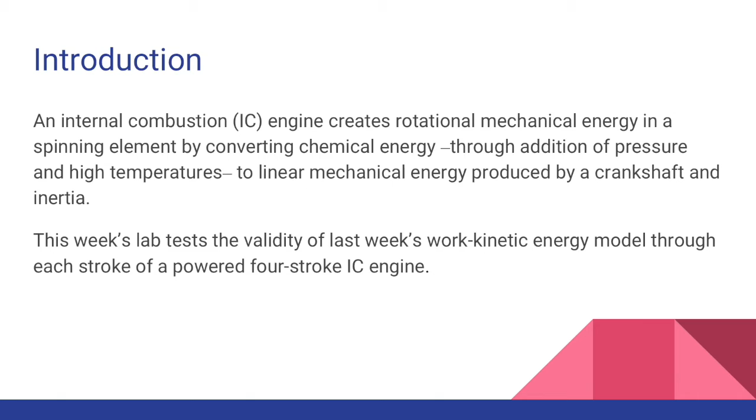To start our analysis, we must first understand each stroke of our engine. During the intake stroke, air is taken into the cylinder through the intake valve while keeping the exhaust valve closed. During compression, both the intake and exhaust valves are closed as the air inside the cylinder is compressed towards the highest point of the piston's travel. This point is known as the top dead center, or TDC.

During the power stroke, compressed air is going to be forced into the cylinder next week during Part 3 to resemble the explosion that is normally created with an air-fuel spark mixture. The piston will travel to its lowest travel point, also known as the bottom dead center or BDC. During this process, both the intake and exhaust valves remain closed.

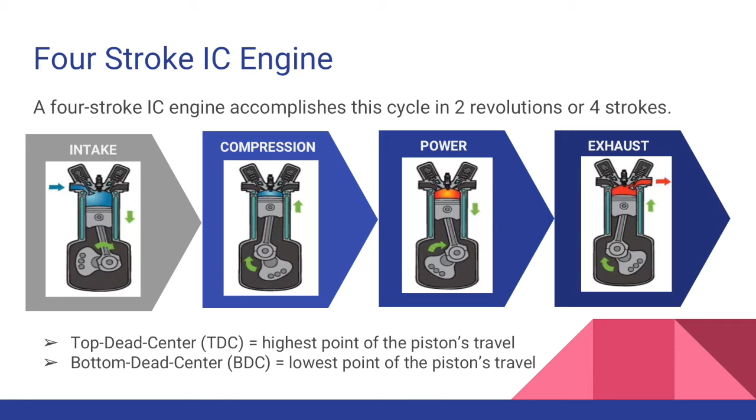During the exhaust stroke, air is released out of the cylinder through the exhaust valve while keeping the intake valve closed. Looking at the graph, we can see that to go through one cycle of our 4-stroke IC engine, the piston displacement will go through 2 total cycles.

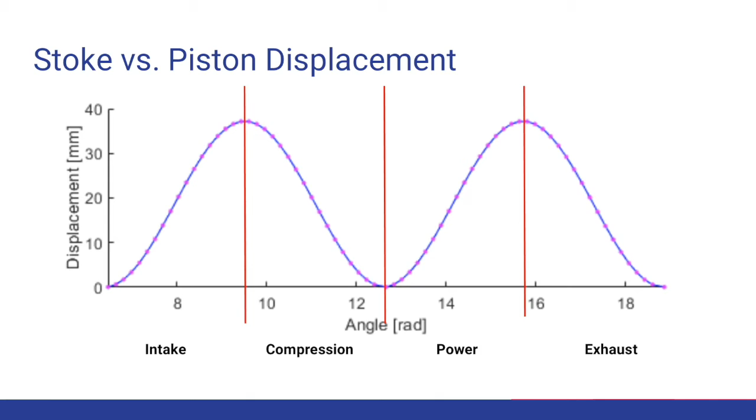From 0 to pi, it's the intake stroke. From pi to 2 pi is the compression stroke. From 2 pi to 3 pi, the power stroke. And finally, from 3 pi to 4 pi, the exhaust stroke. Our first step was obtaining a calibration equation. With the data provided, a regression line was performed, resulting in the calibration equation on the screen.

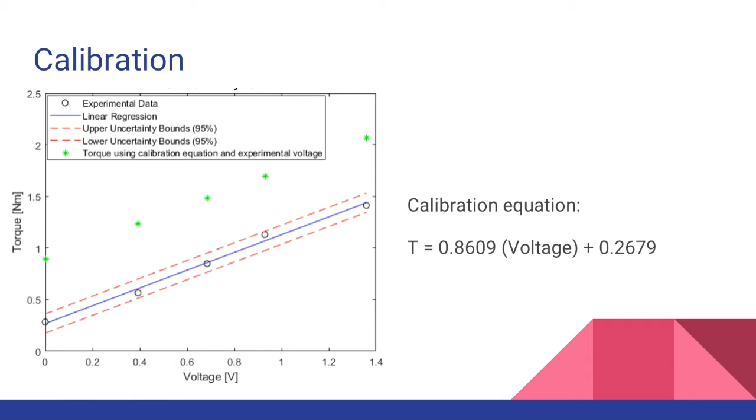During Part 1 of this lab, we learned that the change in kinetic energy is equal to the work done by the motor, air, piston, friction, and error. Since the head of the motor was removed, we were able to neglect the work on air. Also, the displacement of the piston head was found to be relatively small, so the piston work is assumed to be 0 along with the work error.

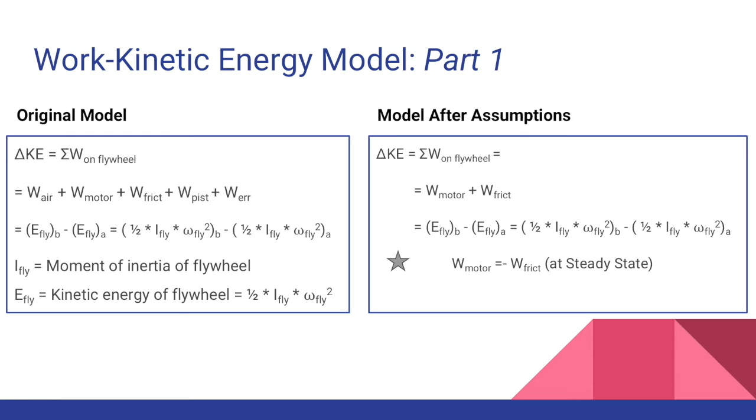Using the work of the motor, torque, angle change, and the angular speed, we were able to calculate the inertia of the flywheel. This is done by accelerating the motor from rest in 2 different cases. In the first case, the motor has 4 flywheels attached, and in the second, only 1. Since we are starting from rest, we can say that omega fly at point A is 0. Therefore, the work kinetic energy model is equal to equation 2 on this slide.

We know all the variables needed to calculate I-fly for each case, since omega fly is equal to the derivative of the angular position versus time graph. But first, we need to understand what I-fly actually is. I-fly for this equation is really the moment of inertia of the flywheels combined with the internal shafts and gears. Therefore, we need 2 acceleration cases because the moment of inertia of these internal parts cannot be solved analytically.

To find the moment of inertia of one flywheel, we must subtract the moment of inertia of one flywheel plus the internal components from the moment of inertia of 4 flywheels plus their internal components. This way, the internal components' moments of inertia will cancel out and leave us with a number that is equal to 3 times the actual moment of inertia of an individual flywheel. Now, to find the moment of inertia of an individual flywheel, we simply divide that value by 3 and get the experimental moment of inertia equal to 0.0022 kilogram meters squared.

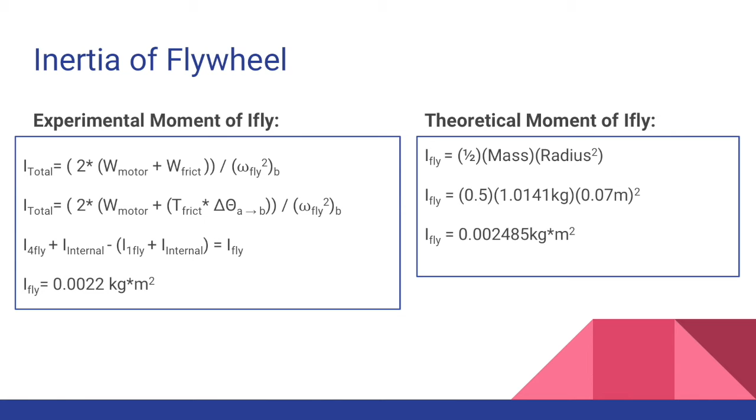The theoretical moment of inertia of a flywheel is found by assuming that the flywheel is a solid disk and using the equation to solve its moment of inertia that way. This was found to be 0.002485 kilogram meters squared, which means our experimental values has an error of 12.9%.

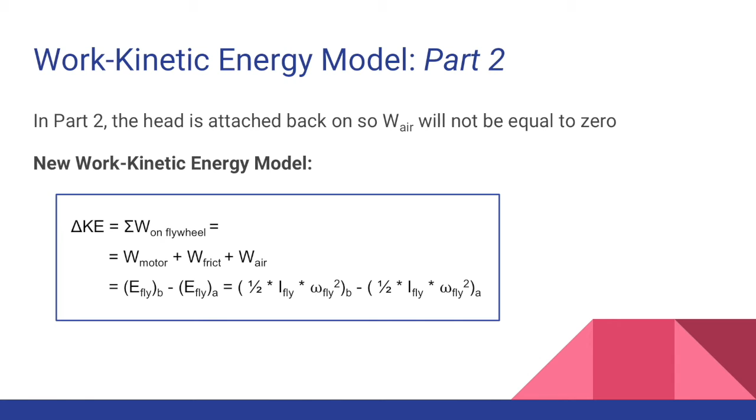The biggest difference between Part 1 and Part 2 of this lab is that now we are reattaching the head. This means that our work kinetic model needs to be adjusted as W air cannot be neglected. During the intake and exhaust strokes, the valves are open, so for those strokes, we can neglect W air. Without pneumatic injection, we can assume that the work in the compression and power stroke are the same in magnitude but opposite in sign.

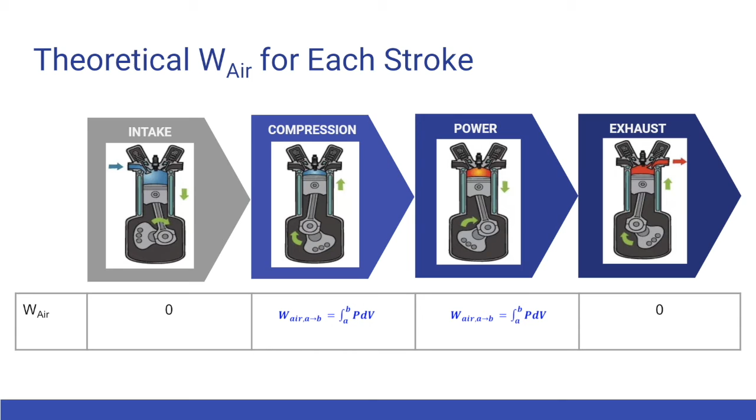The value for work air in the compression and power stroke is equal to the integral of the pressure with respect to the volume, from the beginning of the stroke to the end of the stroke. To calculate the theoretical value of W air, you must first choose if you're going to use the compression or power stroke. In this case, we chose the adiabatic compression stroke. Using known values, we were able to calculate the theoretical W air values.

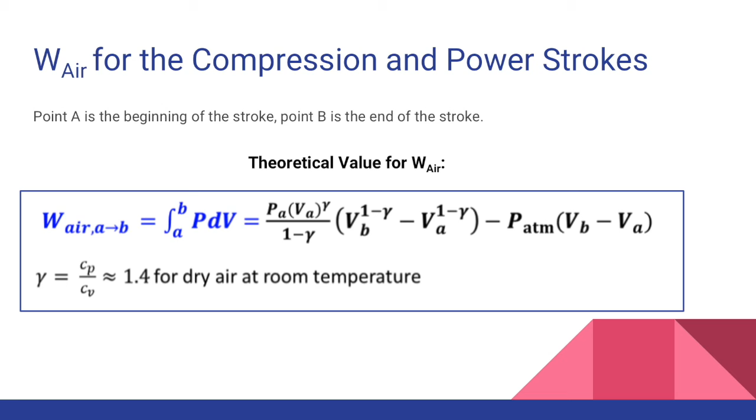The experimental value for work air is found using our new work energy equation. Setting points A and B as the beginning and end of the compression stroke respectively, we can calculate work air. This is because we used the value from I fly from part 1. The angular speeds at point A and point B can be found by taking the derivative of the angular position versus time graph and indexing at the appropriate times for the beginning and end of the stroke.

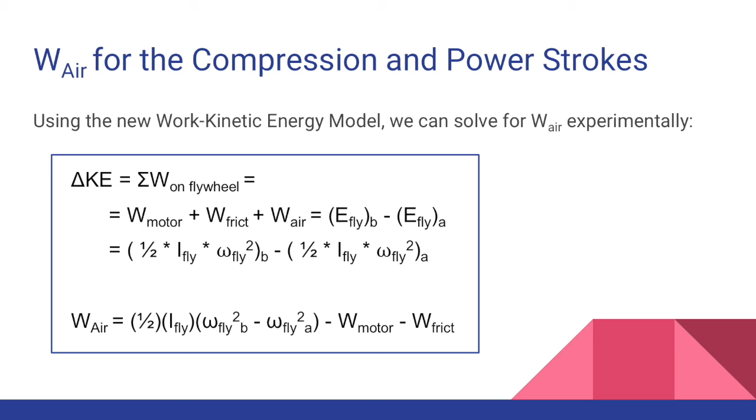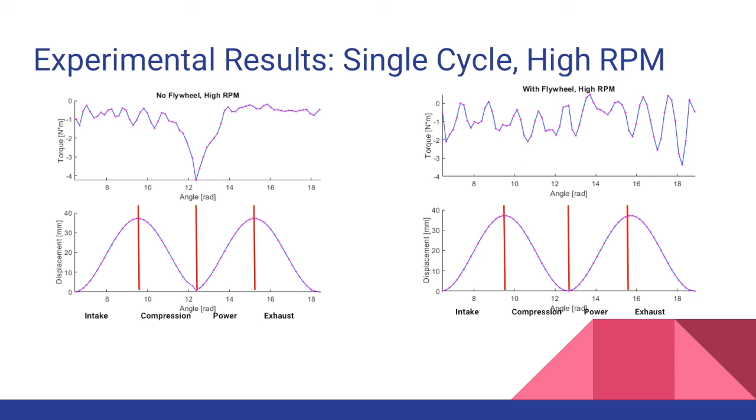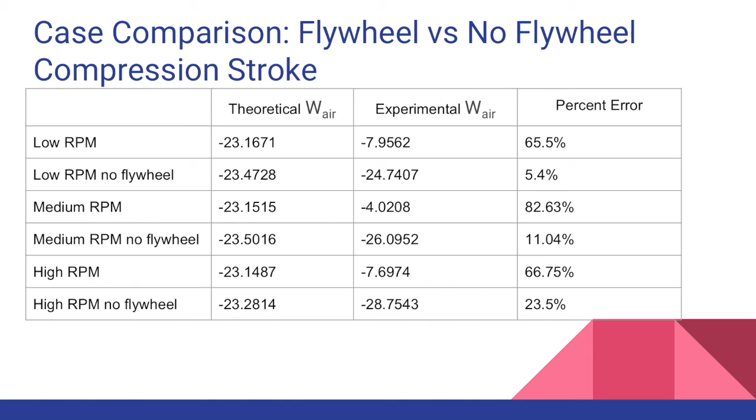In comparing the theoretical work air and the experimental work air, during the compression stroke, we can see that they differ by over 60% in the case with the flywheel. This happens because the work on air is much less with the aid of the inertia of the flywheel. Without the flywheel, the motor is doing all the work to compress the air, so the experimental work air values are similar to the theoretical values. Just as in the compression stroke, we see the same behavior during the power stroke.

To see the validity of our work kinetic energy model, we compare the work air of the compression stroke versus the power stroke. The sum of these work air values should be 0 if our work energy model is valid. As seen in the results, our model is accurate with the flywheel even though the values obtained are different than the theoretical values for work air in each stroke.

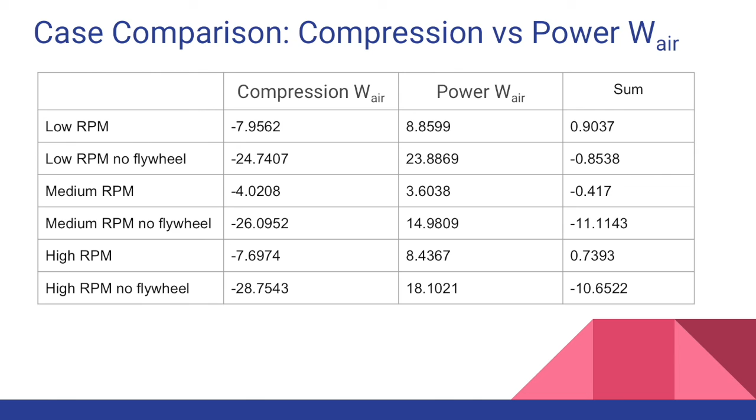This is the case because, as mentioned before, the motor is being helped by the inertia of the flywheel when the flywheel is present. Despite these values being different from our theoretical work air value, they still prove the validity of the work energy model presented in this lab.